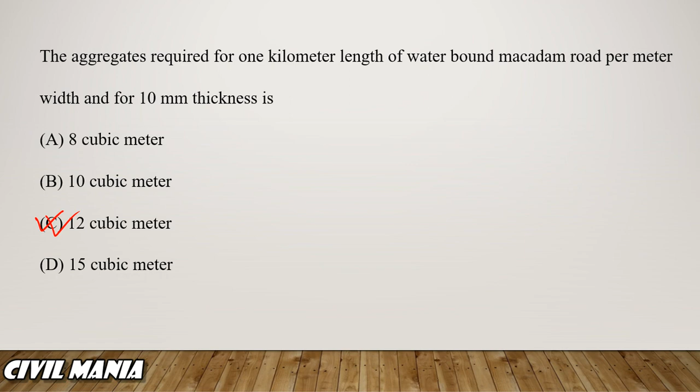Next question, the minimum value of camber provided for thin bituminous hill surfaces - how much camber will be provided for hill surface? That is also the minimum value.

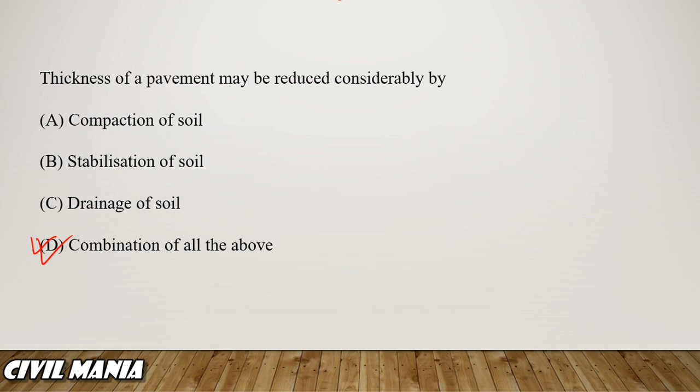What will be the percentage reduction of gradient? It will be 75 by r percentage.

Next question is, the maximum allowable Los Angeles abrasion value for high quality surface course is - the value will be 30%.

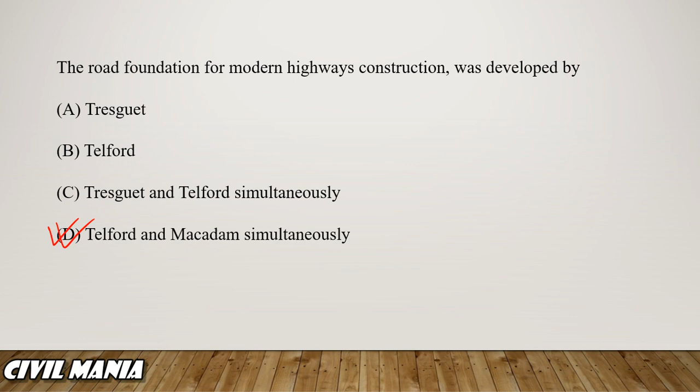Next question is, longitudinal pavement lines marked broken in white paint are for the guidance of the driver, are not to be crossed over, may be crossed over at the discretion of the driver, or all of the above. Those lines may be crossed over at the discretion of the driver.

Next question, the recommended grade of tar for grouting purpose is RT5.

Next question is, according to Highway Research Board of USA, practical lane width is how much? The practical lane width will be 3.6.

Next question is, the radius of a main curve is 300 meter and length of the transitional curve is 100. The angle with tangent to locate the junction point is 3 degree 11 minute.

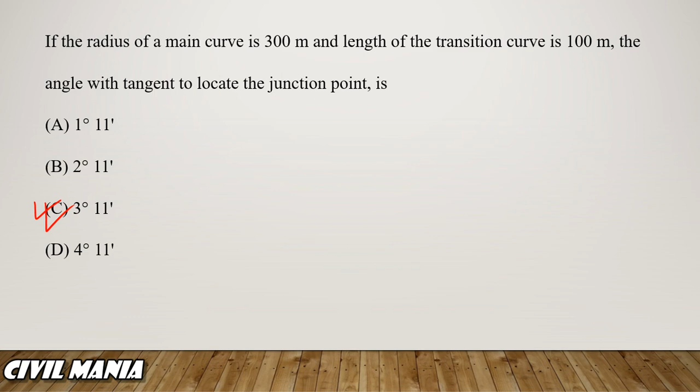Next question is, which of the following premix method is used for base course? Which premix method is used for base course?

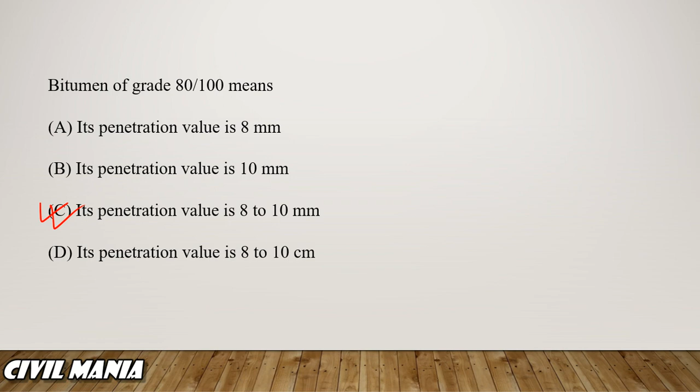The next question is bitumen of grade 80/100 means what? It means the penetration value is 8 to 10 mm. These values we divide by 10, and what we get will be in mm. So 8 to 10 mm is the penetration value.

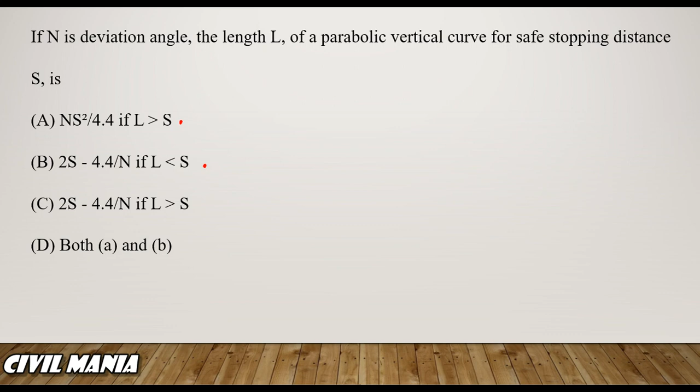Next question is a single lane carriageway whenever changes to two lane carriageway, that is affected by the taper of 1 in 15 to 1 in 20.

Next question is softening point of bitumen to be used for road construction at a place where maximum temperature is 40 degree centigrade. It should be greater than 40 degrees, otherwise it will melt.

Next question is as per IRC 52/1973, for a single lane national highway in hill region: width of the carriageway, shoulder 1.25, total width of the road. So the answer will be all of the above.

Next question is if a lemniscate curve of transition throughout is introduced to connect two parallel roads, the maximum polar angle of the curve is how much? The maximum polar angle will be

30 degrees. After this, next question is the minimum thickness of a layer of fine sand required to cut off capillary rise of water completely should be how much? The minimum thickness of that layer of fine sand required to cut off capillary rise is

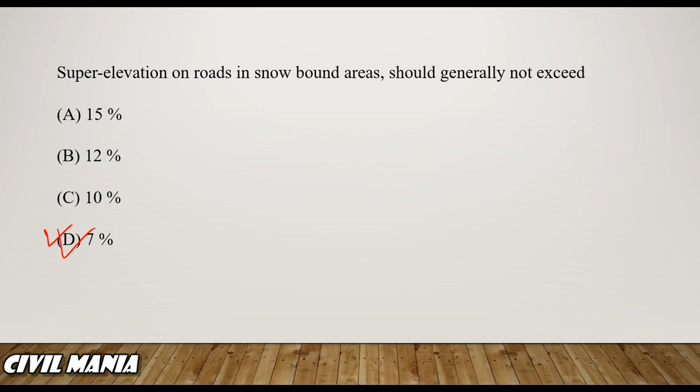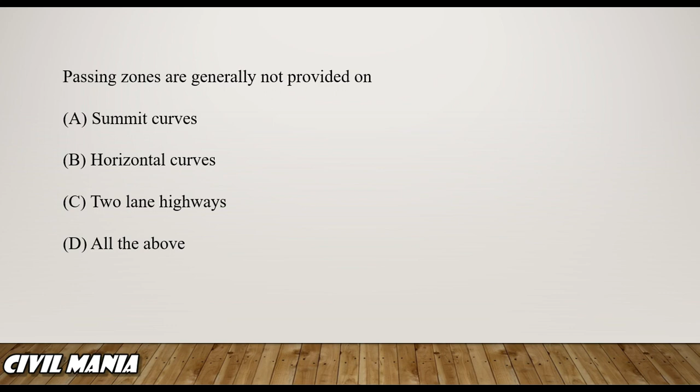Next question is passing zones are generally not provided on: summit curve, horizontal curves, two lane highways, all of the above - everywhere it is not provided.

Next question is in a braking test a vehicle traveling at 36 km/h was stopped at a braking distance of 8 meters. The average value of the vehicle's skid resistance friction coefficient is 0.64.

Next question is the first stage of deciding the alignment of a hill road is reconnaissance.

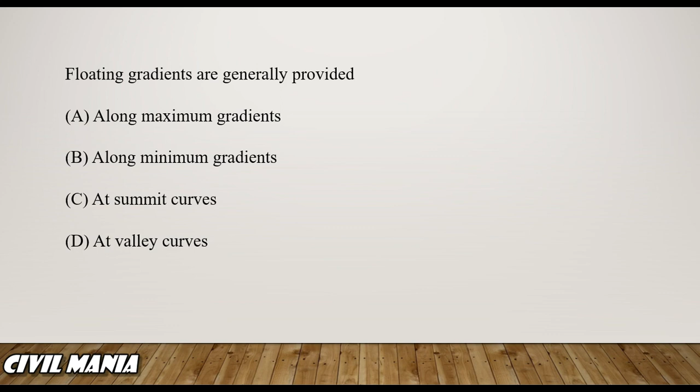Next question is the normal road land width for a national or state highway in open areas should be - for national highway or state highway, the road width in open areas will be 45 meters. Next question is floating gradients are generally provided at the summit curves.

Next question is if the cross slope of a country is up to 10%, the terrain is classified as - when 10% it is classified as plain terrain, rolling terrain, mountainous terrain and steep terrain, and such kind of terrain is classified as

Plain terrain. The reason is the cross slope values: 0 to 10, 10 to 25, 25 to 60, and greater than 60 correspond to plain terrain, rolling terrain, mountainous terrain and steep terrain respectively. So accordingly, up to 10 is plain terrain.

Next question is area of the steel required per meter of pavement for the design wheel load, and permissible stress is 90 kg per centimeter square.

Next question is, in the case of a hairpin bend of a highway, the minimum radius of the inner curve should be all of these options.

Next question is, the minimum vertical clearance of an overhanging tree or any other structure above the surface of a hill should be how much? The minimum clearance of overhanging cliff, the value will be...

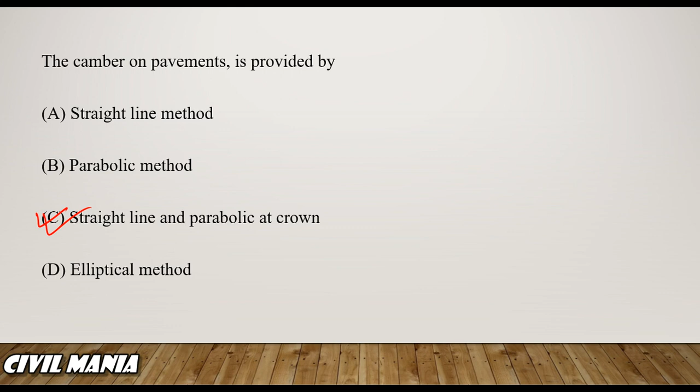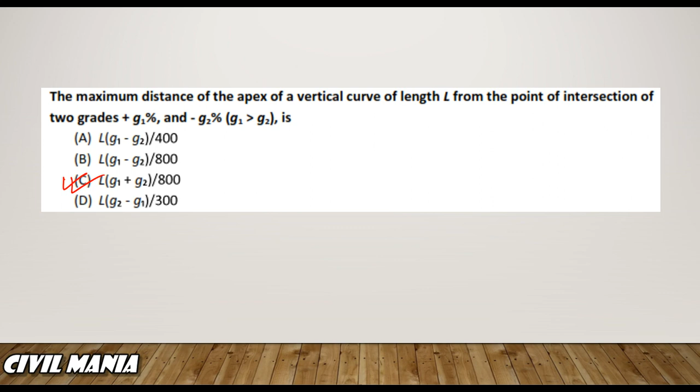Next question is, pick up the incorrect statement: highway circular curves may be simple curve, compound curve, reverse curve, or vertical curve. It cannot be vertical curves.

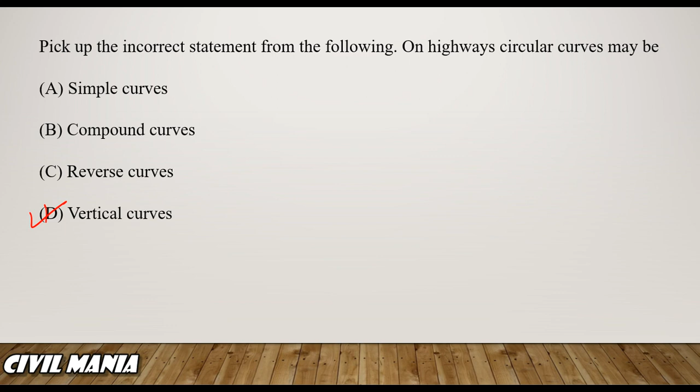If brakes of vehicles are effective, the vehicle running at 30 kmph comes to a stop in 12 meters.

Next question is, from the point of tangency before an intersection, the route markers are fixed at a distance of 15 to 30, 20 to 35, 40 to 50, or 100 to 150. The route markers are fixed at a distance of 100 to 150 meters.

Next question is, the maximum super elevation in rolling terrain in plains is limited to what value? So it will be 7. The super elevation value in hills is 10, and in plains it is 7.

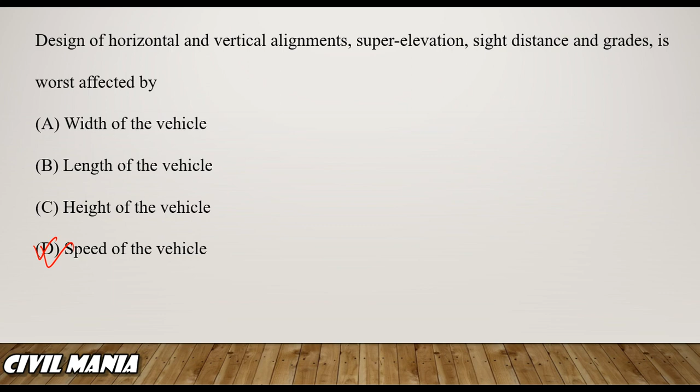Next question is, for comfortable travel on highway, the centrifugal ratio should not exceed...

0.25. Next question is, Border Road Organization for Hilly Regions India was formed in 1960.

BRO. Next question is, for a poorly graded subgrade soil, the thickness of the subbase is 30 centimeters.

Next question is, the usual width of parapet along highway in hilly region is 0.6 meter.

Next question is, in scanty rainfall region, the camber provided will be flatter. Next question is, in waterbound macadam roads, the binding material is stone dust.

Next question is, design of flexible pavement involves wheel load, intensity of traffic, climate of the region, and subgrade condition. The answer is climate of the region.

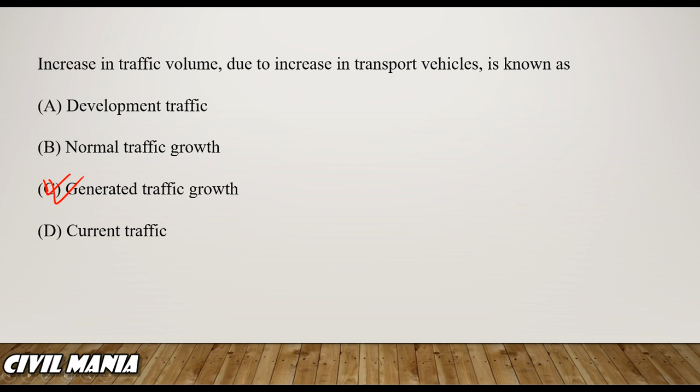Next question is, increase in traffic volume due to increase in transport vehicle is known as generated traffic growth. Next question is, width of the rotary roadway should be equal to the width of the widest road plus the width of one lane.

Next question is, volume of traffic which should immediately use a new road or an improved one when opened to traffic is known as current traffic.

Next question is, volume of traffic which is due to improvement carried out on adjacent area is development traffic.

Next question is, maximum number of passenger cars that can pass a given point on a road during 1 hour under the most ideal roadway and traffic conditions is the basic capacity of the traffic lane.

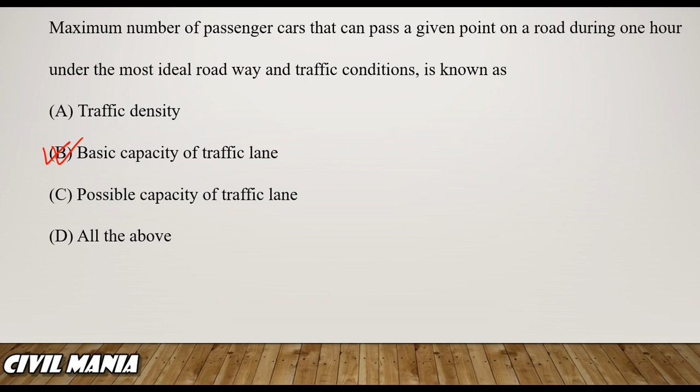Next question is, reference pillar fixed on the line of the proposed road provides the following information: all of the above. Next question is, in an ideal transition curve, the radius of curvature is inversely proportional to...

the length from the beginning of the curve.

Alignment of highway in hilly region is decided on all of the above. Next question is, in case of cement concrete pavement...

the incorrect statement is: the initial cost of construction is low.

Next question is, if D is the degree of the curve, the percentage reduction of gradient is 0.04 D.

Next question is, pick up the incorrect statement from the following: highways are always constructed in straight lines. This is incorrect because highways are never always constructed in straight lines.

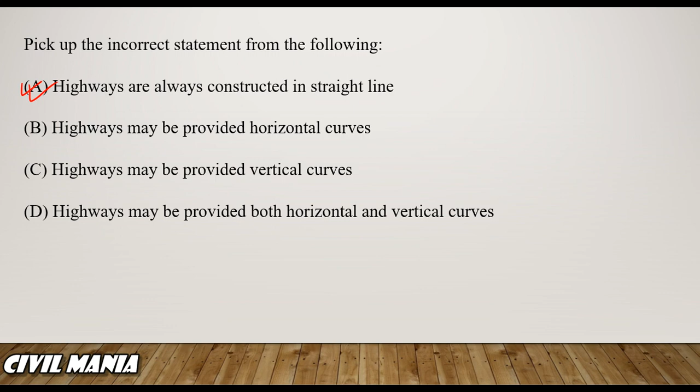Next question is, minimum number of 50 kg cement bags per cubic meter of concrete for a mix corresponding to crushing strength of 280 kg per centimeter square at 28 days: the number of 50 kg bags will be 6.5.

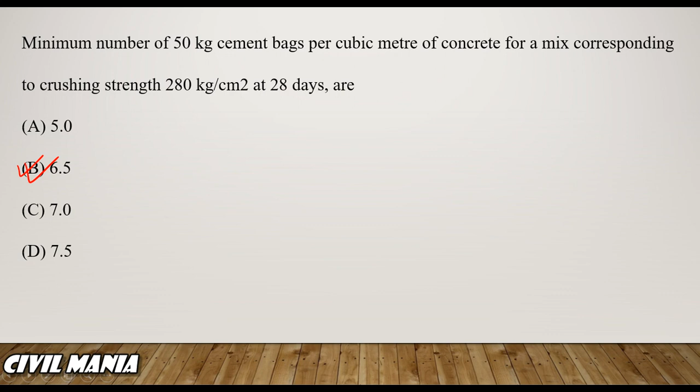Next question is, for Indian conditions, waterbound macadam roads are suitable if daily traffic does not exceed 2000 tons.

Next question: Indian Road Congress (IRC) was formed in the year 1934.

Next question: the steepest gradient permitted on a road which in ordinary condition should not be exceeded is known as the maximum gradient or limiting gradient.

Next question: when each particle of aggregate is thinly coated with cement paste, a heterogeneous solid is formed which is known as concrete. Next question: the width of the shoulder of a carriageway is generally kept at...

Its width is generally kept at 250 centimeters. Next question: the reduction of load capacity in a ruling gradient is 1 in 20, that is 10%.

When calculating overtaking sight distances, the height of the object above the road surface is assumed as 120 centimeters for overtaking.

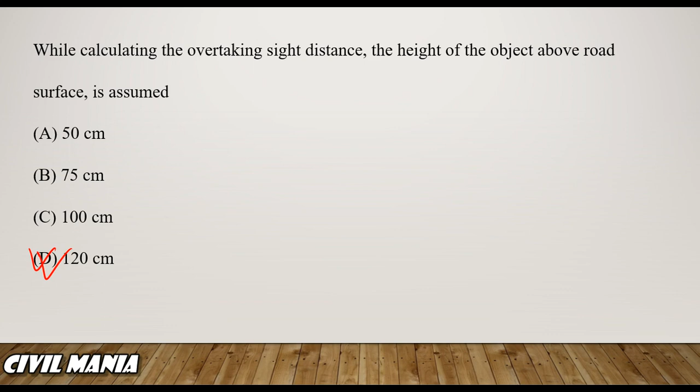Next question: the minimum thickness of the base of a flexible pavement is 10 centimeters. It is asking about the minimum, because the usual range is 10 to 30, so the minimum is 10 centimeters.

Next question: widening of roads on curves in hilly regions is done on the inner side.

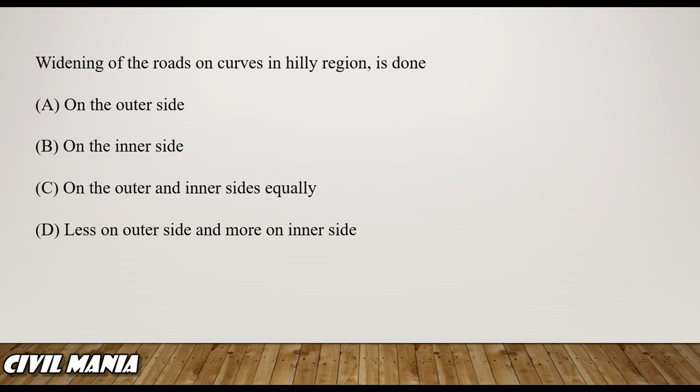Next question: side drains on both sides of the hill road are essential when the road is in cutting.

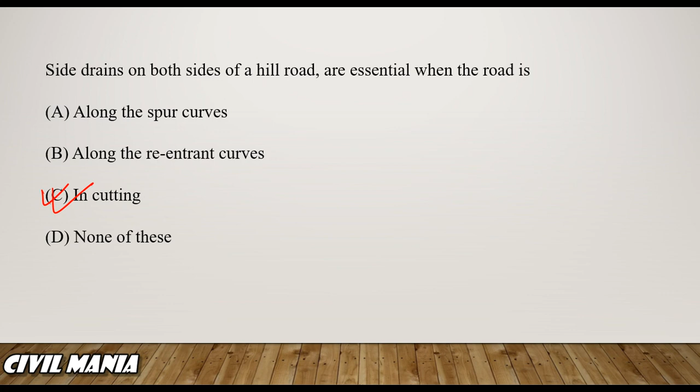Next question: the wall constructed for the stability of the backfill portion of a road on the downhill side is known as a retaining wall.

Next question: in a right angle bend of a road provided with a transition throughout, the maximum polar angle is 15 degrees.

Next question: E is equal to velocity in kmph squared, divided by 225 times r.

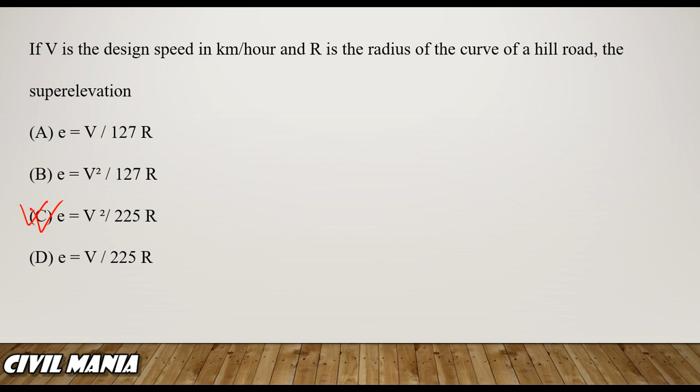Next question: along a hill road, a side drain is provided on the inner side of both A and B. It is provided on the inner side.

Next question: the total length of a valley curve formed by -3% and +2% gradients. The total length will be 84.6 meters.

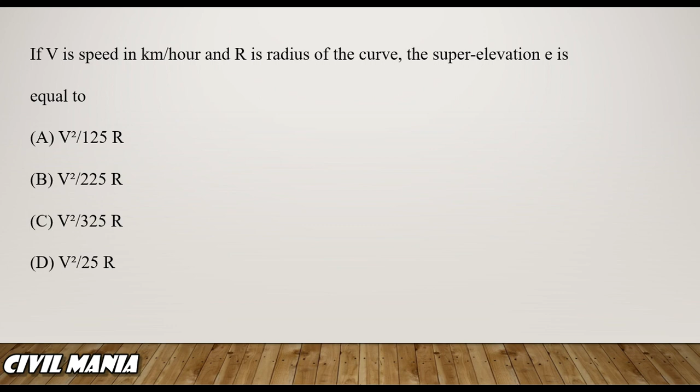Next question: if V is the speed in kmph, the super elevation is V squared divided by 225 times R.

Next question: the weaving length of a roadway is the distance between the channelizing islands. Next question: the following type of pavement is generally known as flexible pavement.

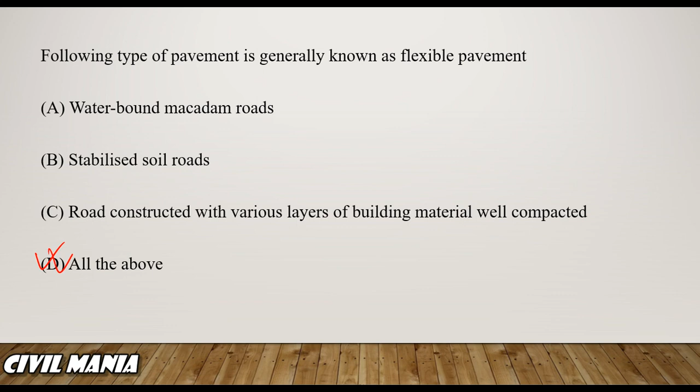All of the above. Next question: the first operation during the detailed survey of a hill road is fixation of the benchmark. Next question is incorrect.

The width of the right of way is decided so as to accommodate vertical curves - this is incorrect. Next question: the type of transition curve generally provided on hill roads is spiral.

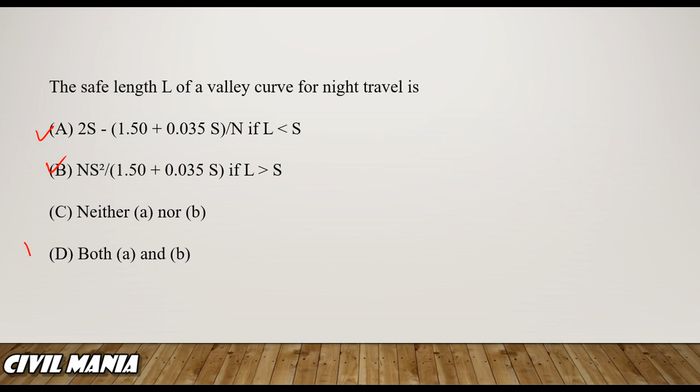Next question: a road with 8.8 meters width for a two-lane national highway or state highway in mountainous terrain - this excludes the width of the parapet and side drain.

Next question: the radius of curvature provided along a transition curve varies from infinity to the radius of the circular curve.